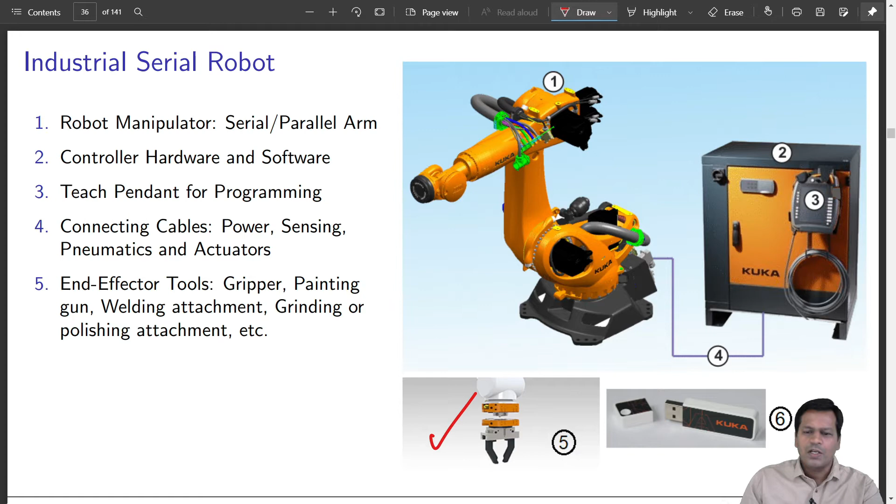End effector tool, this is the end effector tool. Over here it is shown as a gripper, which can be a two-fingered gripper, a three-fingered gripper, or it can be a painting gun, a welding attachment, a grinding or polishing attachment, etc. And finally, it also has software. This software goes inside the PC which is within the controller. I will show you that once I open this controller box.

Optional accessories include the camera if it is fitted to the robot, external axes apart from the 6 regular axes which a 6-DOF industrial robot has. Standard sensors included with the robot include the joint angular sensors. It may have some force sensor within the joint, or optionally it can have external sensors.

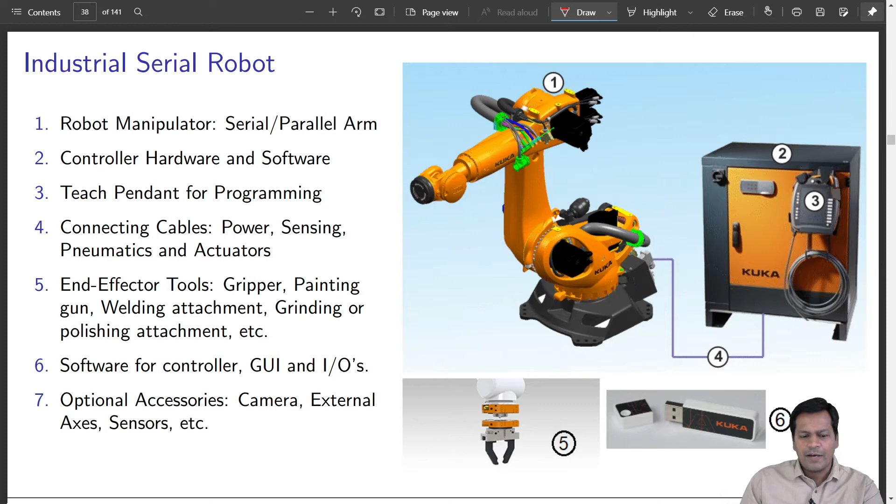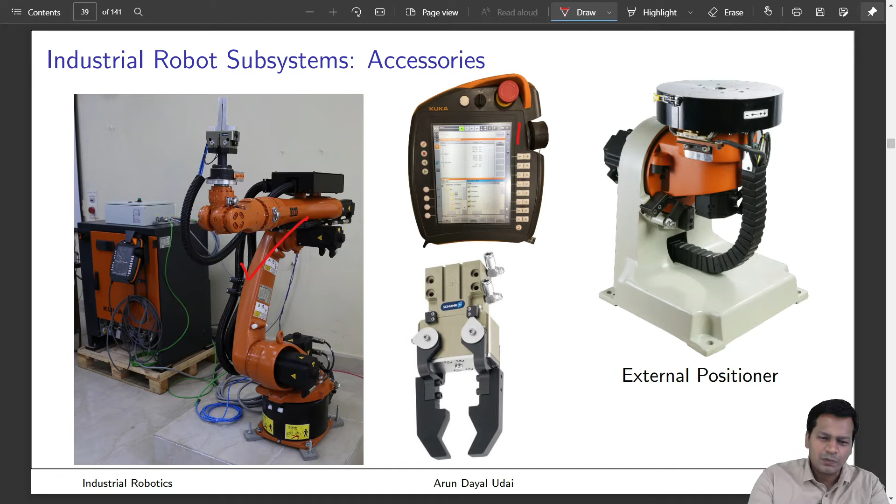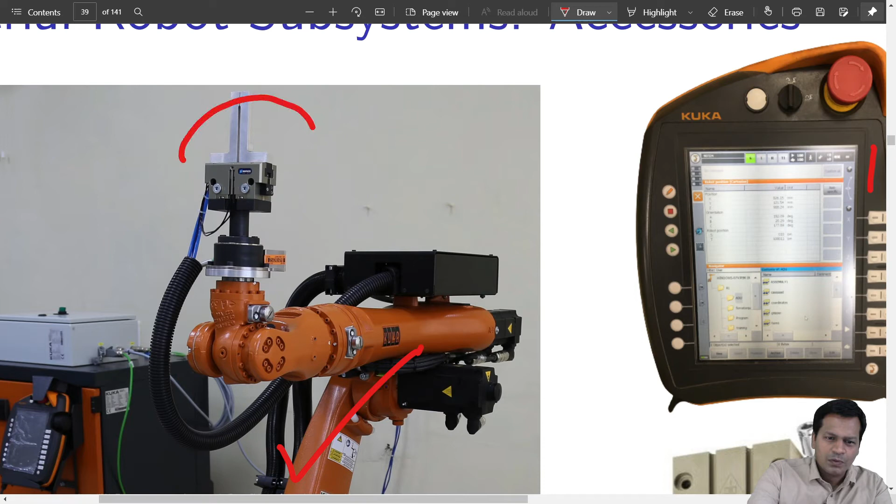More closely now we can see what it is. This is the standard industrial robot which you saw just before. It is attached with a two-fingered gripper. I will just zoom so that you can see it more closely. This is a two-fingered gripper. This is the first finger, this is the second one. It is fitted on top of a force sensor.

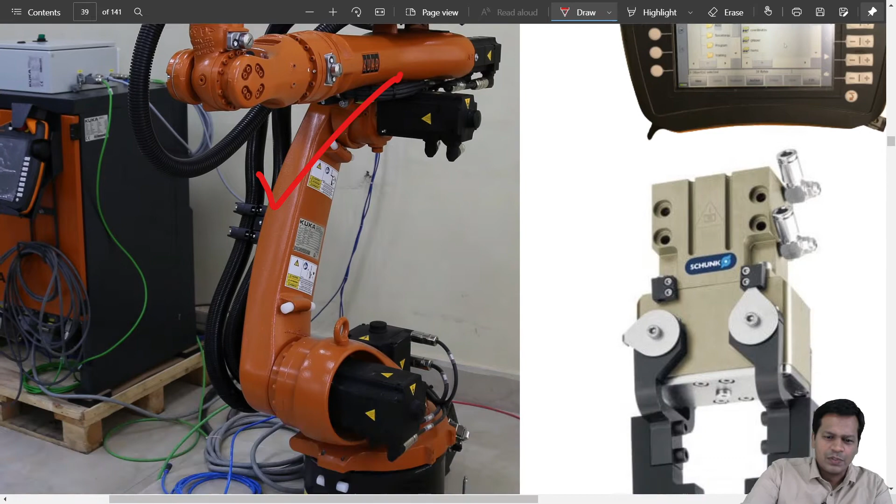Now what you see, this is the arm which has some cabling all around. This is the teach pendant, which is normally kept on top of the controller. This is connected to the controller so that all the programs that you do on this go directly into the PC sitting inside this controller. Don't worry, I will open up this box as well.

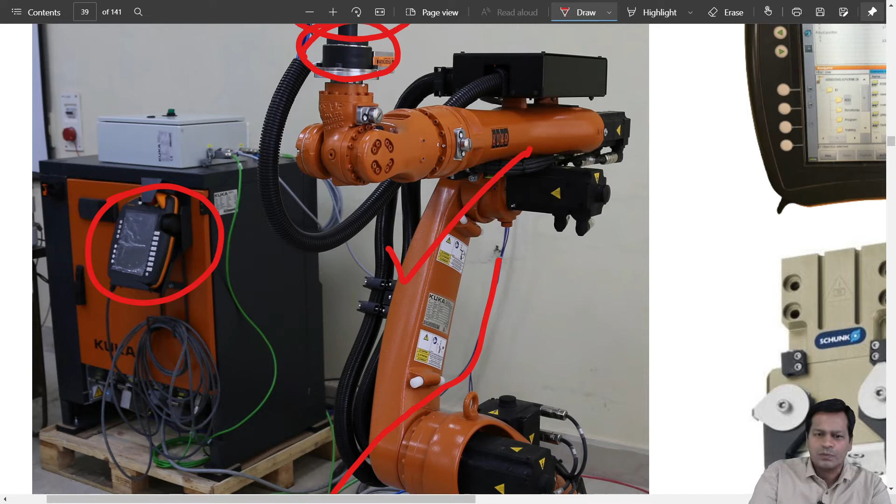So the blue cable that you see here is for the pneumatic pressure. This goes to the pneumatic gripper fitted at the end effector. The huge black cables that you see here are the standard cabling for the actuators, and they also give passages to other external connectors. The bigger one over here is the standard gripper which is fitted.

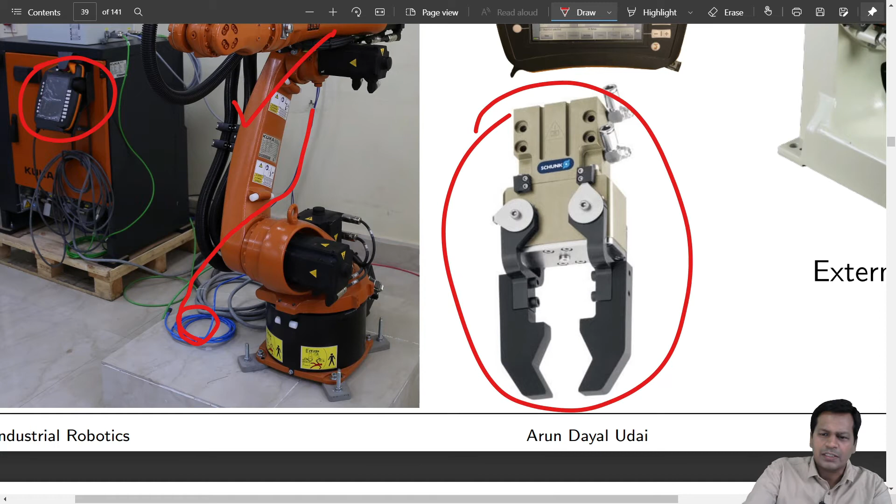More closely now you see this is the teach pendant. What things are there on it? It has some standard tools, like this, which is nothing but a standard emergency stop button. It has some customizable keys. You can do programming on them, or it has standard functions like jogging of the robot in joint control mode or jogging directly in terms of Cartesian axes.

Run button for the program to be executed. It has a standard view over here which shows all the directories. So it is just like a standard display of your computer, so that you can do programming with ease.

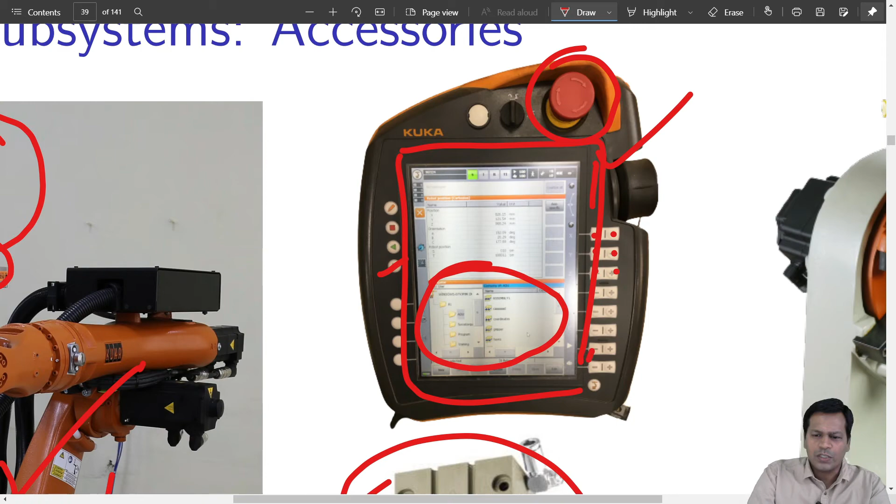Now the bigger one over here is an external axis. We can mount the job on this platform so that it can be machined using this particular robot. Moreover, this axis can be integrated with the robot so that it becomes the seventh axis of the robot. So all 7 axes can be controlled using the same controller normally meant for the robot. So these are some of the accessories.